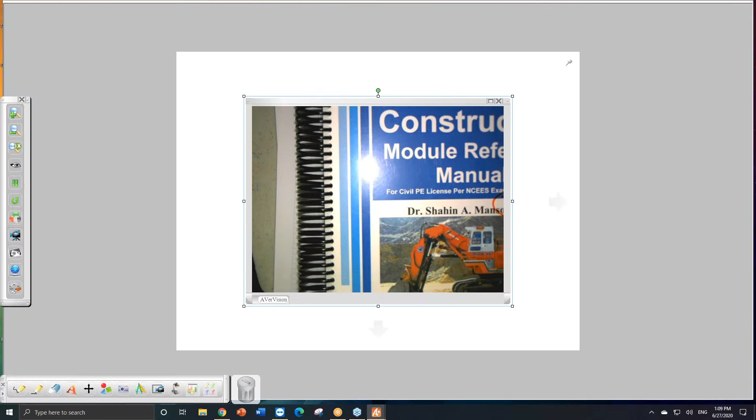So today is Saturday, the 27th of June, and this is a construction workshop. I hope all of you are healthy and studying very hard for the exam, for the October exam. Always check with the NCEES, as I mentioned before many times.

Today we have a session, and tomorrow also have a session for construction. We have it from 9 to 12 tomorrow, not as posted from 1 to 4, because I found there is a conflict. As I announced this morning, probably some of you were here and already heard this. For the civil AM, as I mentioned, I will have one session.

July 4th is coming, July 4th from 1 to 4. Transportation, I finished today, so no more sessions. I made one session to replace one of these sessions I missed.

So for construction, I have today, the 27th, from 1 to 4, and tomorrow the 28th, instead of 1 to 4, it is from 9 to 12, because I do have seismic tomorrow from 1 to 4. So there was a conflict, so I changed it, and I believe it was sent to you.

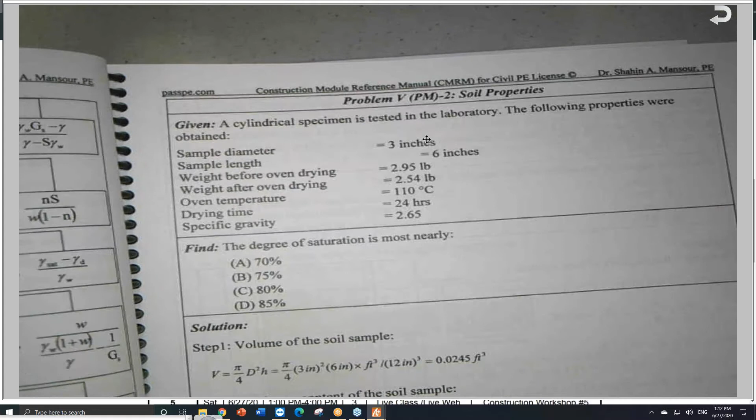Please make sure that you really understand the materials very well, especially the soil classification, because in this book here, for some reason -- that's why when I start the class I will send it to you guys -- if you look to the NCEES, let me bring one of the NCEES books here if I have it handy.

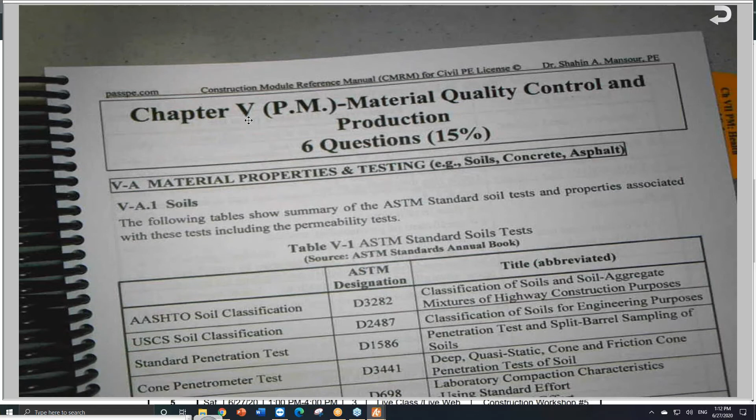They still include some problems related to soil classification for the afternoon, for transport, for construction. So for example, this problem here is from the NCEES practice exam for construction in the afternoon, a construction PM practice exam. I don't have a formal chapter for soil classification, and I need to include this or send it to you. I cover it for the AM, yes I do cover it for AM, but I will be glad to include it also with the PM for construction, for those of you who are not taking the AM.

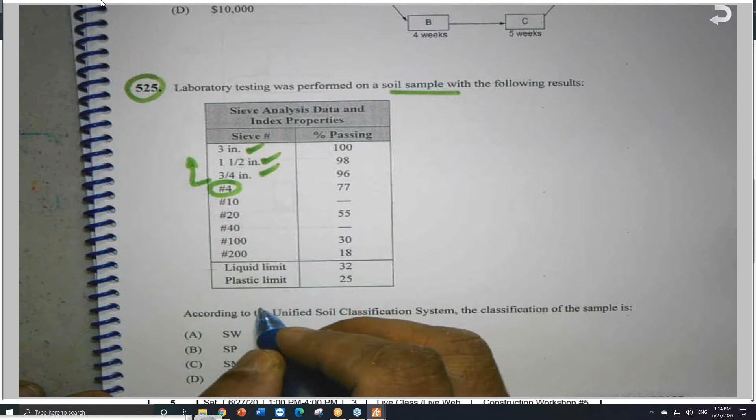So for soil classification, some problems are easy and some are really tough. Let's start with an easy one. Problem 525: laboratory testing was performed on a soil sample with the following results. Sieve number 3 inch, 1.5, 3/4, and number 4 -- anything before number 4 is expressed in terms of inches. After that they start to number them 4 all the way to 200, so this is 4 openings per linear inch, 10, and so on. And they provide the liquid limit, LL, and the plastic limit, PL.

And as you know, there are two systems. Here he needs it to be classified based on the Unified Soil Classification System, USCS. We will do it, but before I go to the USCS system, I will challenge you.

Let us solve the same problem. First, before I put the problem, I will call it problem 525A, okay? Another problem. I need the soil classification based per AASHTO, for the same given information. And I will look for four answers, and here will be the challenge - see if we're going to come up with four different answers, or all of us are going to come up with one correct answer.

But before I give you two or three minutes to do it, be careful about this. This is percent passing. Sometimes they give you percentage retained. So there is a huge difference.

And a common mistake that I found in the past - today is 6/27, and this is construction. So when you have a sieve, like number 4, which we said has 4 openings per linear inch, this is why you'll find that the opening of each one - 1 inch, as you know, is 25.4 millimeter, divided by 4. So if you divide 25.4 by 4, this gives you about 6.35.

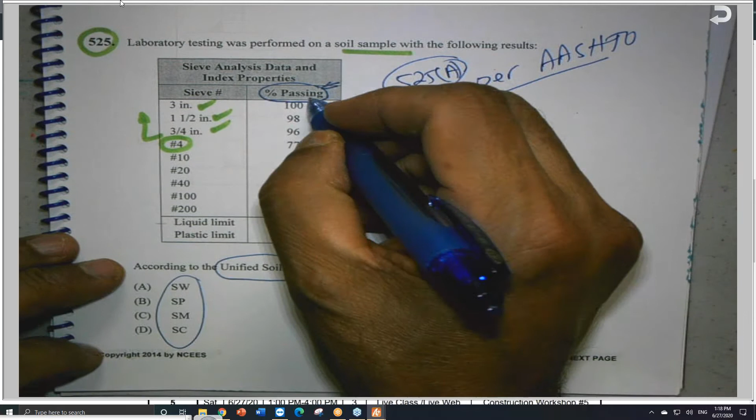So be careful on the problem statement - read whether it is percent passing or percent retained. So if this is number 4 and he gives me, for example, percent passing 77, that means the percent that went through is 77%. What is retained? Retained is the difference between 100 and 77. So that means what is retained here is 23% retained. So this is retained and this is passed - the percent passing or the percent passed.

Sometimes they give you this and sometimes they give you this. In our case, he gave us the 77%, the percent passing. And the same story - this is the one that went through, 77%, that means I have 23 retained. And if you go to number 200, I have 18% passed, that means I have 82 retained. So we always need to remember this, the difference between retained and passed, or percent passing.

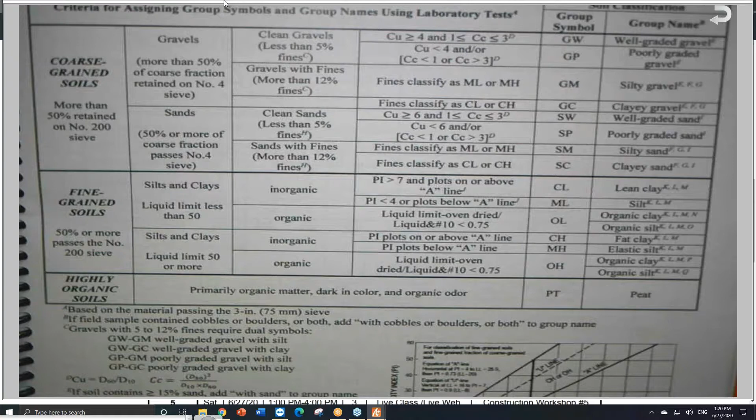So the chart that we use for the Unified Soil Classification System is a very famous chart. It's available everywhere in my books, and I'm sure you have it. This, for example, is from the AM book. But I will move to the AASHTO first. If you don't have the chart, here is a chart.

Here is a chart for the AASHTO - this is the chart that we use for the AASHTO soil classification system. I hope it's clear. If it's not clear, here it is, I will make it clear.

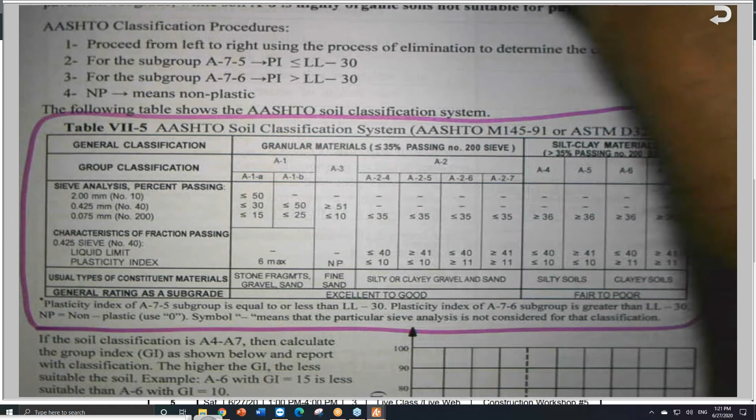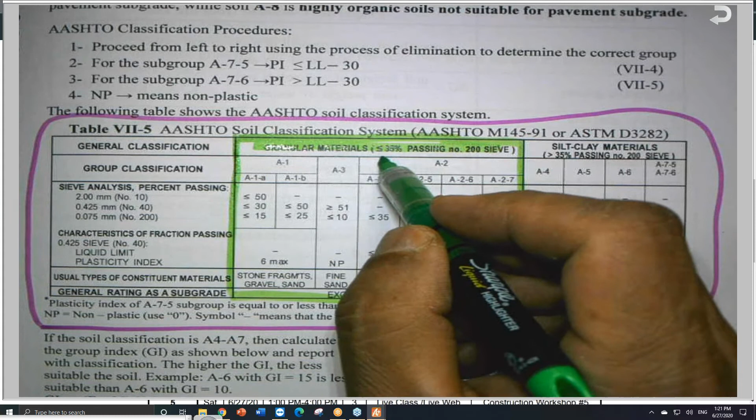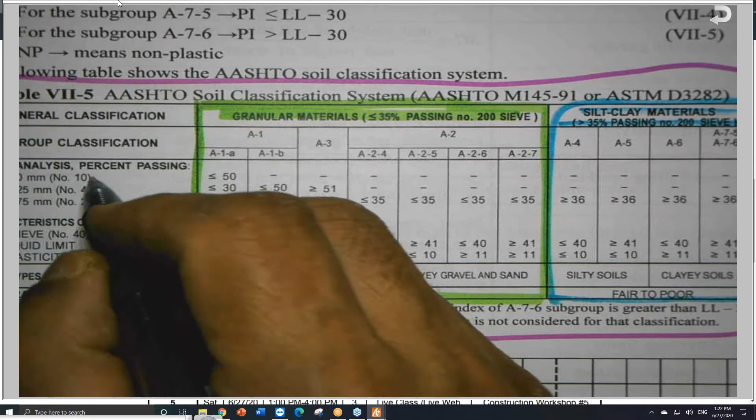As you recall, or as we discussed, this chart is divided into two main sections. This section here, which is the green box, is the granular materials, less than or equal to 35% passing number 200. And the blue one, next to it, is where we have more than 35% passing. Here is less than or equal 35%, and here is greater than 35% passing number 200. So if we are able to - and after that we have number 10, number 40, number 200, and here, by the way, the 0.075 millimeter.

And here is what else here? Number 40 and number 10, they have number 4, they don't have it here, which is 4.76.

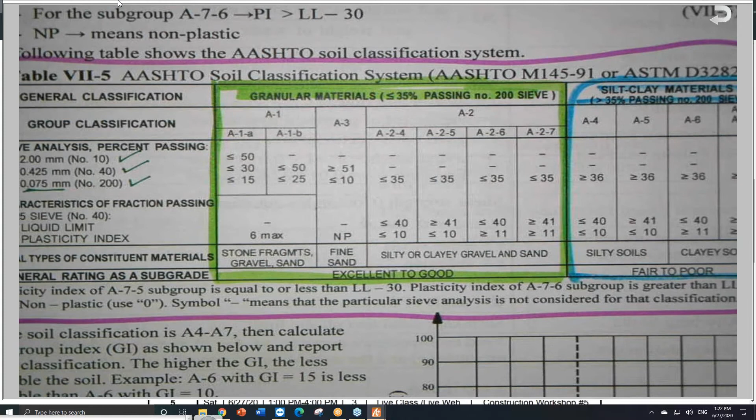So in this case, we need to decide if we are in the green box or the blue box based on the percentage passing number 200. The problem statement told us, here it is, already I did it for you. So this is number 200. So we have 18% passed and 82% retained.

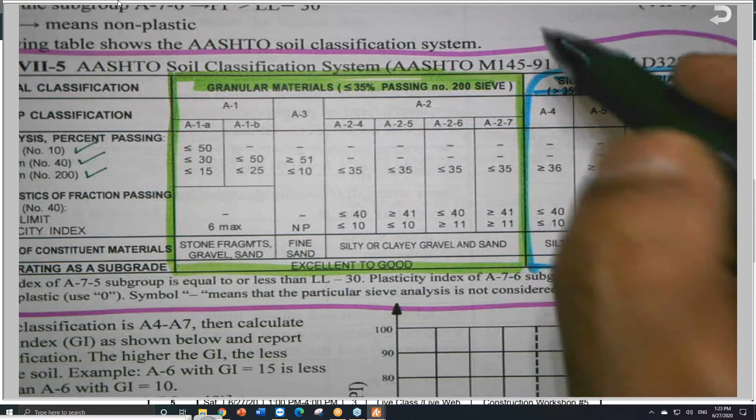Okay, and after that, using liquid limit and the plastic limit, let me give you a chance, all of you, using this problem and using the table in front of you, let us come up with the AASHTO system, which is based on the A system, as we call it. So it is A1, it could be A1A or A1B, A3, A2, and we have subgroups under A2, and after that A4, A5, A6, and A7 is divided into A7-5 and A7-6.

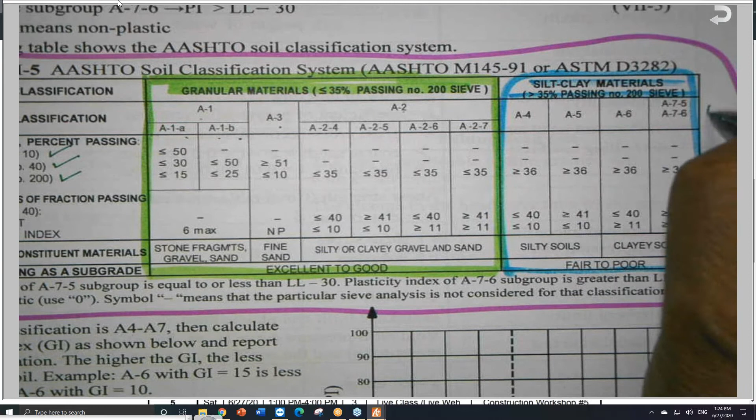Okay, so there is another column here. It is A-8, by the way, but it's dropped. A-8 is the worst soil that exists on Earth. It is not good at all for any kind of foundation, and this is why some books drop this column completely, because it is very bad soil, very bad soil.

And as you can see here at the bottom of this table, you'll find that we do have excellent to good. So A1 being the best, by the way, and the soil is deteriorating as we go this way. This is fair to poor.

So the soil quality is deteriorating, soil A1 being the best soil and A8 being the worst. We cannot really use it at all for any kind of foundation, either for a pavement or for a house or for any kind of foundation, because it is organic material, soil that has a lot of organic materials. And as you know, we cannot compact organic materials, because if you remember the compaction, 90%, 95%, and so on, we talked about this before.

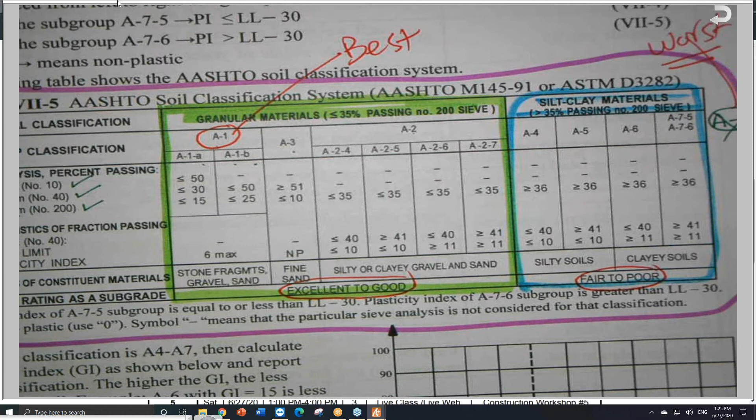Let me give you a few minutes, and I'm looking for problem 525. I need you to classify it per AASHTO, which is the A system. Give me the A number, and we will see if we are agreeing on one answer or what's next. Let me give you a couple minutes and do your best. Let me just zoom out a little bit just in case.

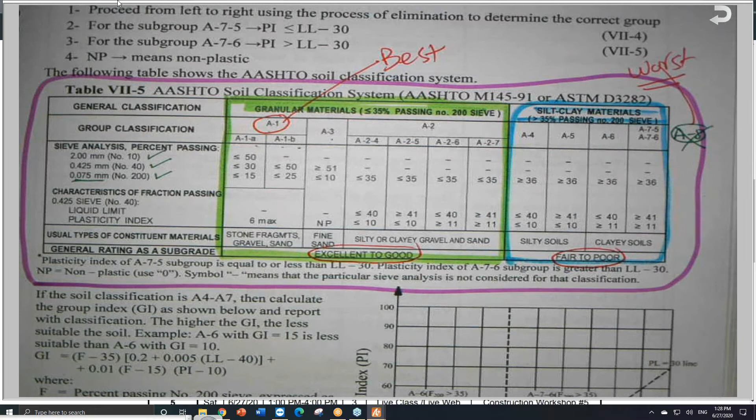Okay, so problem 525 of the NCEES construction PE. What is the soil classification here? I get A-2-4. A-2-4 and A-2-4 and 0.

Okay, and I will talk about what is meant by this 0 here. So we got two answers so far. Another answer, A-2-4.

Okay, look into this chart here. We have 18% passed number 200. So I am in the green zone, less than 35% passing number 200. So I am in the green, so I will see number 10. Number 10, I don't have any information about number 10 for whatever reason. And number 40, I have number 40. Also it's blank, so I will skip these two.

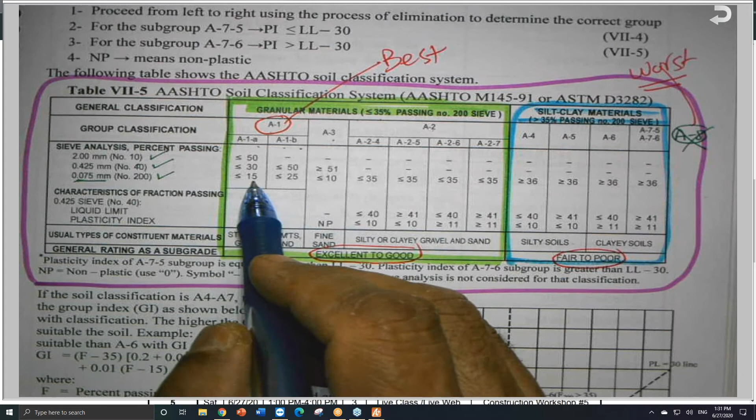So for number 200, I know percent passing is 18%. So number 200 here is less than or equal to 15, less than 25. So this is out and this is out. So A1 and A3 are out. So for 35, all of them are eligible, so A2-4, A2-5, A2-6, and A2-7. So I am in this category here, A2.

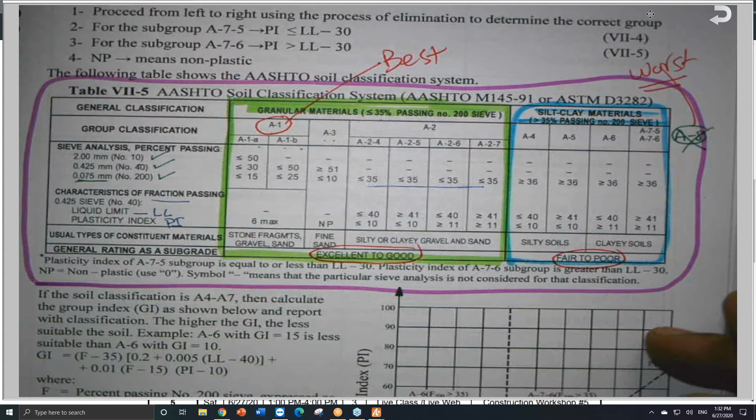Okay, and sieve number, characteristic of the fraction passing. Okay, so I have the liquid limit and PI, plasticity index, as all of you know. So plasticity index PI is liquid limit minus plastic limit. Liquid limit is 32 and the plastic limit is 25. So 32 minus 25 is 7. So PI, the plasticity index, is 7. So in this case, I am 7. So here I will come to liquid limit. I have 32, so this is less than 40, so this is less than or equal to 40. Greater than, this is out. Okay, less than, it may be. Greater than, so this is out.

It's a process of elimination. And after that, the PI. So I have only two left. This is less than or equal to 10, or greater than or equal to 11. My PI is only 7. PI equals 7, so in this case, this is out and this is in. So the answer so far is A-2-4.

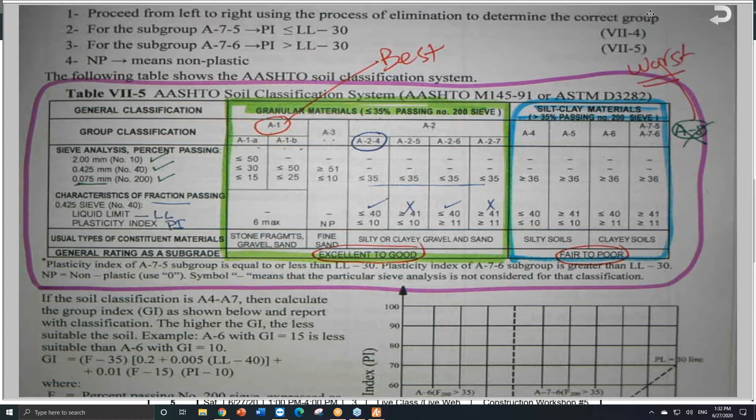A-2-4. So if the same problem is repeated again and I have answer A-2-4, this is the answer, whatever answer B, C, or D, based on the AASHTO classification system. Okay, some of you added the 0 next to it. We have something called GI, the group index. GI we use only for the AASHTO system, and the GI is given by this equation.

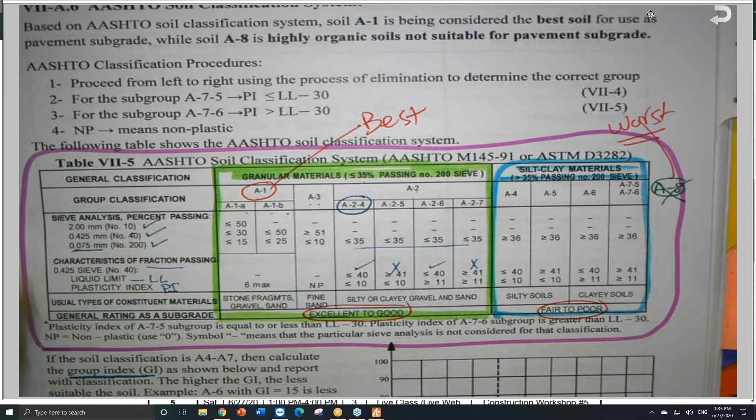So GI - the higher the GI, the less suitable the soil. What is the GI? The group index. If the soil is classified A4 to A7, this is a silt and clay, a fine soil. So for silt-clay soil where we have more than 35% passing number 200, the GI is applicable only to soils from A4 to A7. I need you to remember that.

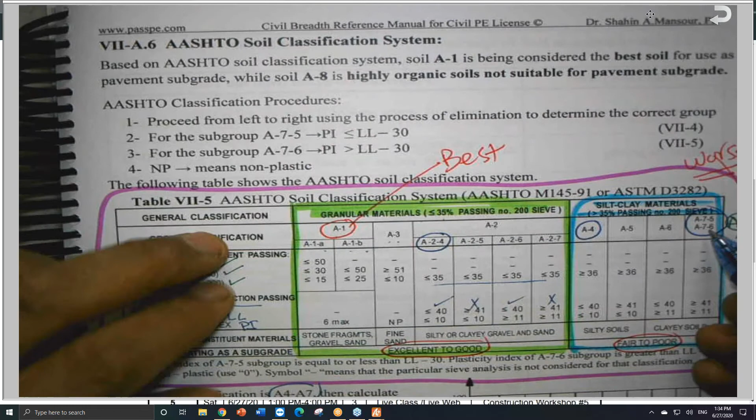By the way, for A75 and A76, if you are in the blue box, we use these two equations to decide which category we are in - whether we are under A75 or A76 - based on checking these two equations. So I need you to be aware of that, and decide which one based on the calculations.

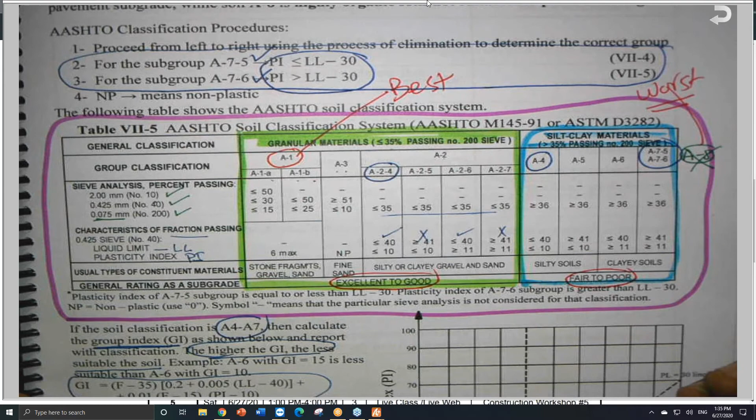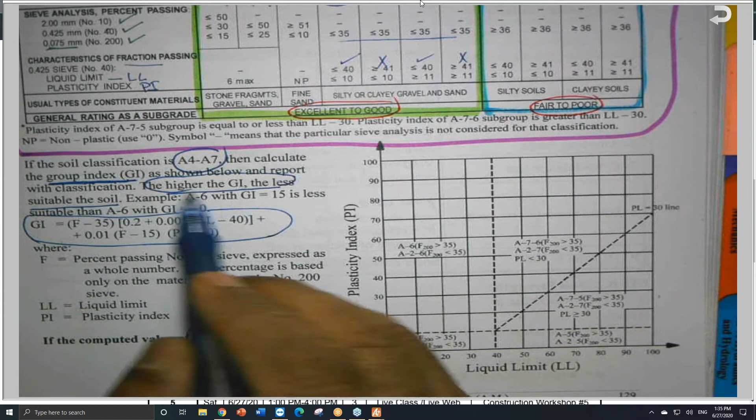Number two, the higher the GI, the less suitable. For example, A6 with a GI of 15 is less suitable than A6 with a GI of 10. So comparing GI of 10 and GI of 15, the one with GI of 15 is less suitable compared to the one with GI of 10.

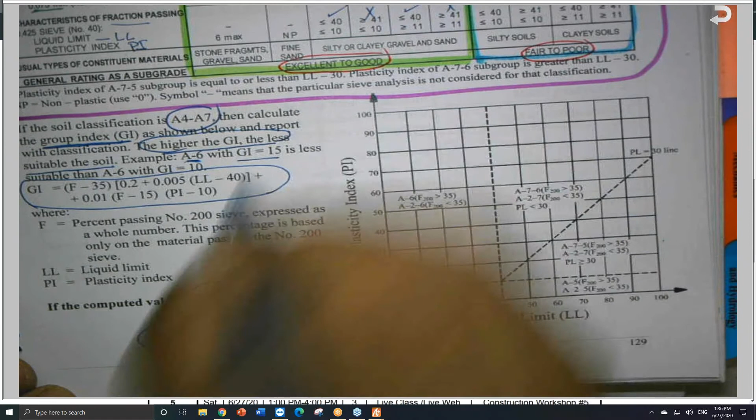So the lower the number, the better; the higher the number, the less suitable. If I have a choice between A-6 with 10 and A-6 with 15, he can ask you this question. He could also give you A-6 of 8 and A-6 of 12. So I give you 10, 15, 8, and 12, and you are asked to select one of these soils. Which one would you select? A6(10), A6(15), A6(8), or A6(12)?

The higher the number, the less suitable the soil; the lower the number, the better the soil. So the lowest number here is 8. I will pick this as the soil that is more suitable than the other types of soils as a good foundation material.

Okay, good, so far so good. So we need to be aware of the GI issue just in case he gives it to you. A-4 all the way to A-7 - we said those are the fine grained soils. And as you know, A7 is broken down into A7-5 and A7-6. So if you are between A4 and A7, the GI, the group index, could be calculated.

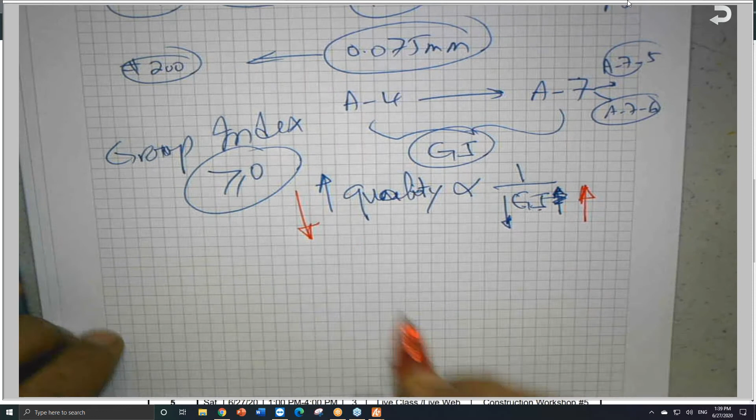So the quality of the soil is inversely proportional to the GI. The smaller the GI, the better the quality. The higher the GI, the lower the quality. So higher GI means lower quality, lower GI means better quality, or more suitable. So the soil with the lower GI is better - just a way to remind you of the relationship between the GI and the suitability or quality of the soil.

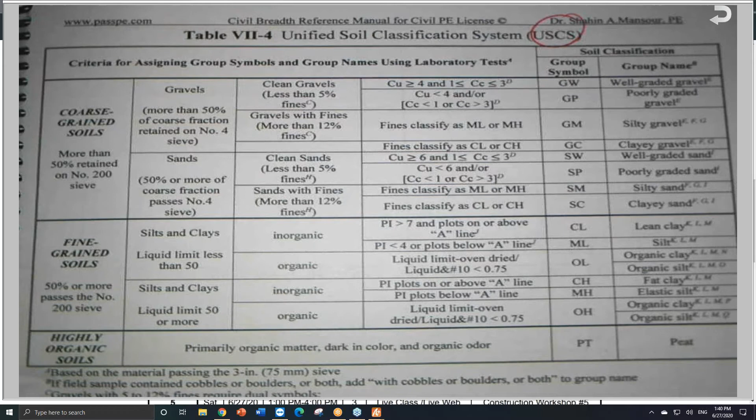So the Unified Soil Classification System is a little bit more involved - I don't like to say difficult. This is the table for the Unified Soil Classification System. What we are looking for is the group symbol, one of these.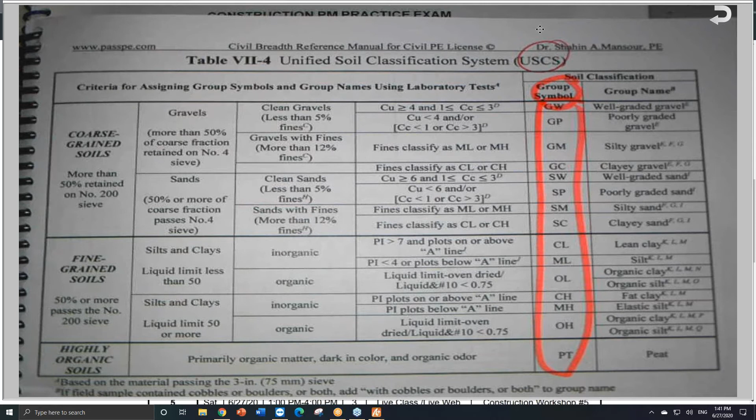This is what we are looking for. The table is divided into three main categories, in fact two of them are the main ones, and the third one is basically nothing, like the A8. So this is one, and this is two.

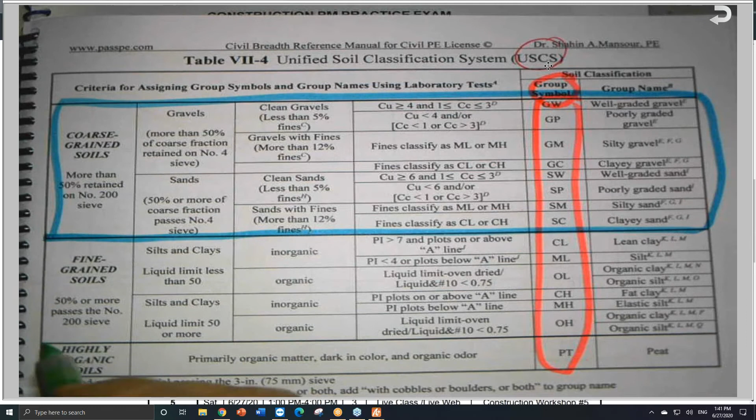And the third one at the bottom, the yellow one, which is organic material. Nobody will ask you to do that, because basically it's very easy. There's nothing really needed to be calculated or determined. It's just a matter of the soil having a lot of organic materials, natural materials. So this is primarily organic matter, dark in color, with organic odor.

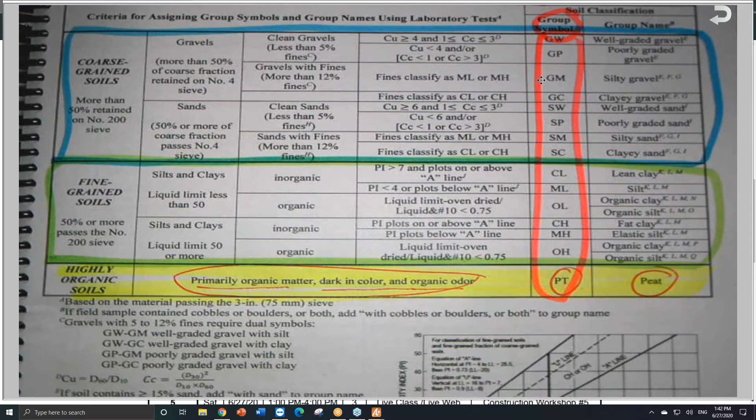And this is a highly organic soil. Obviously, this soil is not suitable at all. This is the worst. This is like A8, like the AASHTO classification system A8 group. A8 is the worst one.

So basically, I am between the blue and the green. The blue one is a coarse grain soil, which starts with G or S, sand or gravel. The second one, the green one here, is a fine grain soil.

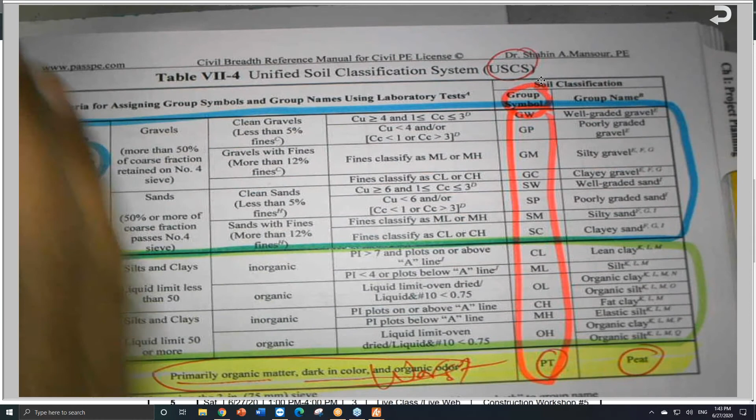So again, by the process of elimination, we need to first determine if we are in the blue box or the green box. The yellow, forget it, as I told you. After that, we proceed from left to right by the process of elimination until you come to one of these symbols, a group symbol here, and the group name is here.

For example, GW is well graded gravel, GP is poorly graded gravel, and so on. So they give us the name. If you'd like more info, there are also a lot of footnotes at the bottom here. They give the explanation for all these things.

I need you also to be aware there is something called the plasticity chart. This is called the plasticity chart for fine grained soil. We use it only for the silt and the clay and mixtures of silt and clay.

We have liquid limit and plastic limit because coarse grained soil like sand and gravel, they don't have something called liquid limit or plastic limit, because they are coarse grained.

And there is a handout, I believe I sent it. I would be glad to send it to you. I have more info about liquid limit and plastic limit. Probably during the break I will try to locate it, and if I locate it, I will be glad to go over it.

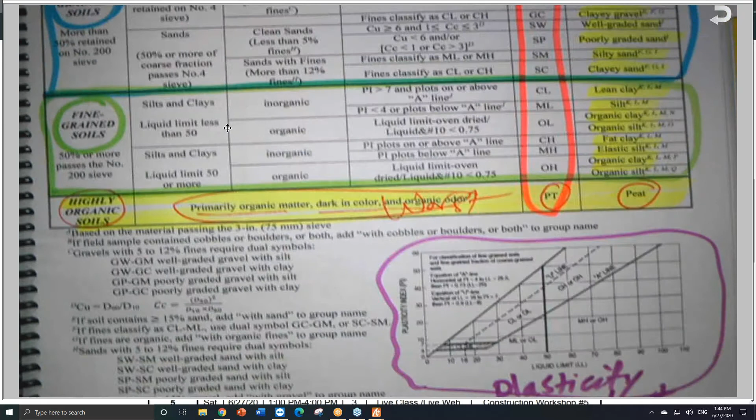So there are some questions you might be asked to determine, but it will be dual symbols. Here it is, like this. This is dual, D-U-A-L. And this is another one, this for gravel and this for sand, dual symbol.

So the moment you see it is SW-SM, for example, let me get closer here. Here it is SW-SM, SW-SC, SP-SM, SP-SC, or here GW-GM, GW-GC, GP-GM, and GP-GC. So these dual symbols could exist in one of the problems.

And they tell us how can we determine this? Again, it's still the same chart, and we can. Here we are lucky because the problem he asked, problem number 525 of the NCEES, is just a single symbol. So this is a very easy one.

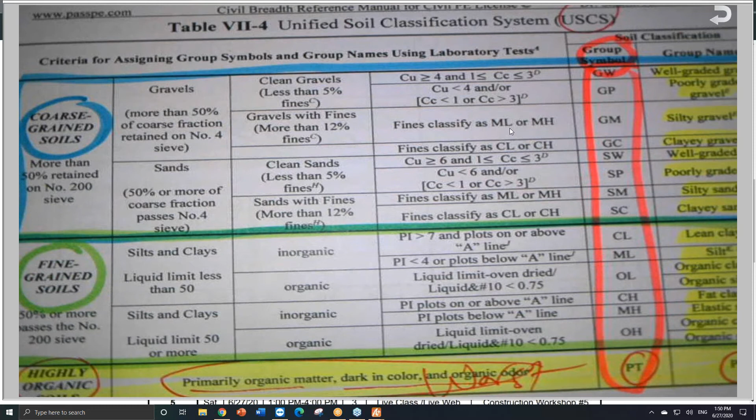So I got, okay, I got two different answers. Let us see. I got answer C and answer D. I got this and I got this, one of you or two of you, I believe. Okay, so we got SM and SC.

Okay, so C or D. Okay, and we got another answer C. Okay.

So if we look at this, we need to determine if I am in the blue or the green, which is either in the coarse or the fine. This is coarse, obviously, as you can see from here, starting with S. S for sand, S for sand.

As you know, the Unified Soil Classification System uses letters, not like AASHTO. They are using A1 to A8, as we discussed for the AASHTO system. So it's called the A system. This is the best soil, and this is the worst soil, and the soil is deteriorating as we move from A1 all the way to A8. A8, nobody will ask you to use it at all, or to determine or identify it, because it's very easy and nobody uses it.

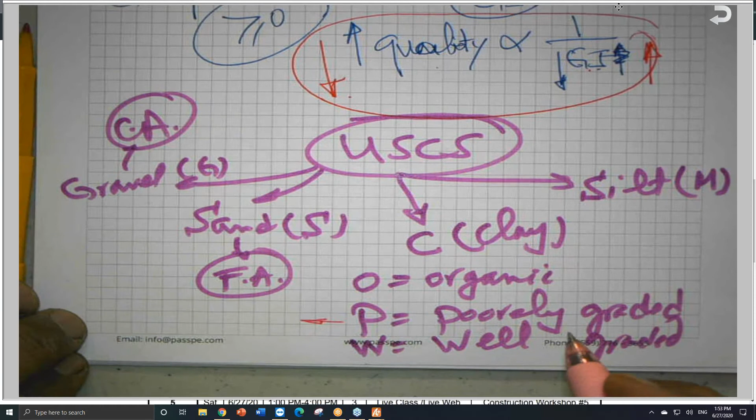As you recall my discussion before, maybe I mentioned that, and forgive me, sometimes I repeat myself, sometimes I assume I discussed something before, sometimes I don't. So, the poorly graded soil, this is, they have the same size, same size. Well graded is diversified sizes. So the poorly graded, which is the same size, like all the grains almost the same size. Okay, this is what is meant by poorly graded. Well graded is diversification, meaning there is a big one and there is a small one, so diversification. Okay, so the small particles will fit into the voids of the big ones.

You see the analogy, and this is what I'm telling you, that sometimes I repeat my jokes. Diversified, like when you buy mutual funds. Mutual funds consist of different stocks. You are diversifying your portfolio, as professional people use it. But same size is like one stock. If I buy one stock and it went up, I made some money, but if it went down, I will lose all my money. Diversified, like mutual funds, mixes different stocks, so they balance each other. One will go up, one will go down. If you like to remember it that way, I have no problem with that.

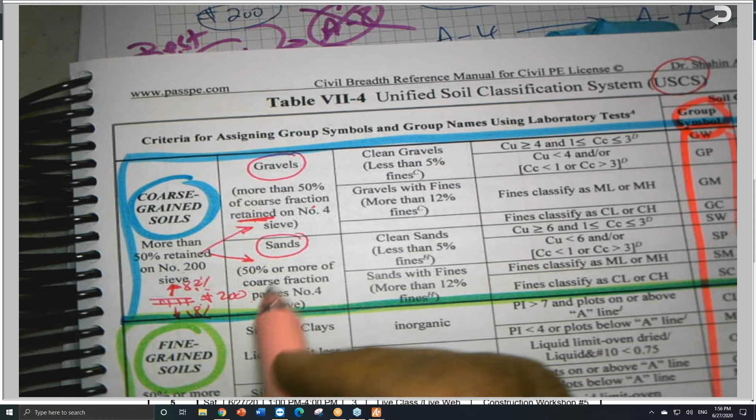You see, so sometimes when you draw something like that, this is very good. So more than 50% retained, so I have 82%, so I am here. After that, I need to decide if I am here or here, either gravel or sand. You're moving from left to right. So here for the gravel, more than 50% coarse retained. Be careful, sometimes they use retained, sometimes they use passes. For example, here, 50% or more passes number 4. Here they are using retained. So I need to look at number 4. Number 4, I have 23% retained and 77% passed. So I have more than 50, I have 77, so I am here. So right now I need to move, if I am here or here.

Okay, in this case, he said that the clean sands have less than 5% fines. What do you mean by fines? Let's go to H. When we have a dual symbol for the sand. I don't have anything right now to indicate that. And after that, sand with fines more than 12%. So when they talk about fines, they are talking about the percentage passing number 200. Anything passing number 200, we call it fine. So I needed to remember that.

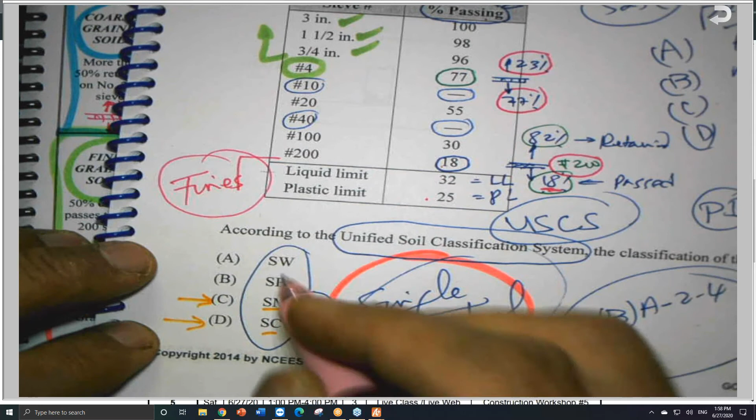So I have 18% passing number 200. So for sands with fines more than 12%, I have 18. So that means I am here. So I am either SM or SC, which are the 2 answers, by the way. Here it is, SM and SC. The answers C and D, they always do this. They give us problems such that you are confused between 2 answers.

So how am I going to decide right now? I have fines classifying as ML or MH. Here the fines are classified as CL or CH. This is the plasticity chart. So I need to come to the plasticity chart.

Do I have the liquid limit for this job? Yes, liquid limit is given to be 32, and the PI, plasticity index, is 7. So I have 32 and 7. This is 30, 32 is somewhere here. And 7 is here, so I am here.

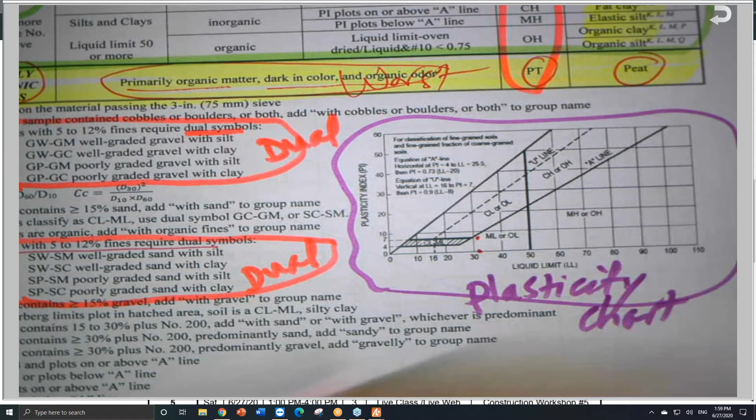So I have the fines classified either ML or OL. Let us look to the chart here. ML or OL, I have ML here. So my soil is SM, because the fines are classified to be ML. So the plasticity chart will help me decide between these two answers, and this is why the answer is C, which is SM. So this is the correct answer.

Agree or disagree? Those who selected D, I need you to be aware of that. You have to go one more step in order to get the answer. So the soil classification, some problems are really difficult, it's not easy like this one. This is an easy one, but we need to make sure that we really understand what is meant by this and this and this.

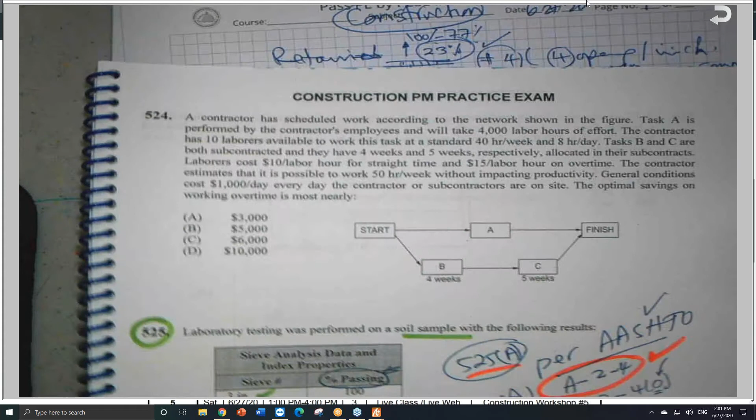Also, for example, if we compare this problem here, problem number 525, and we said that we have 525A which is AASHTO, and we agreed on the A-2-4 if you remember. So you can repeat the same problem. So if you compare this with this one here, let me give you a couple minutes to read it. Remember, you have only 6 minutes per question. Read it and let me know what do you think. Let us take about a couple minutes or so.

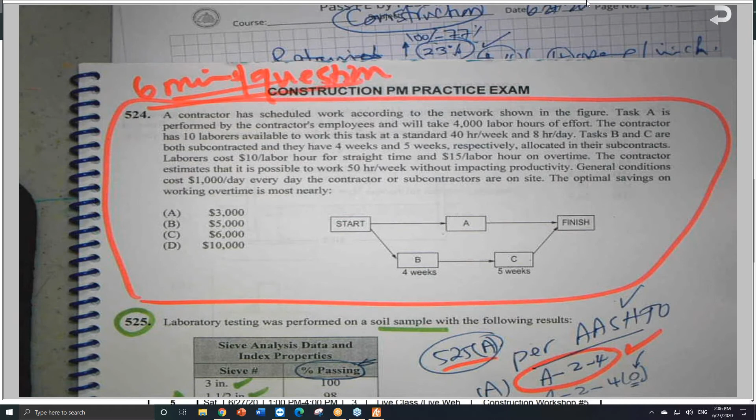Okay, obviously from my perspective, if I read this problem compared to the problem we just finished, and this is the reason I'm referring to it, obviously this one is easy and straightforward, and it would take probably, if we know the process and we're familiar with it, it's straightforward. There is nothing really very difficult or tricky around it.

But these types of problems have a lot of 'if this happens, what will happen? If this happens, what will happen?' Many scenarios - the problem has more than one scenario or many scenarios.

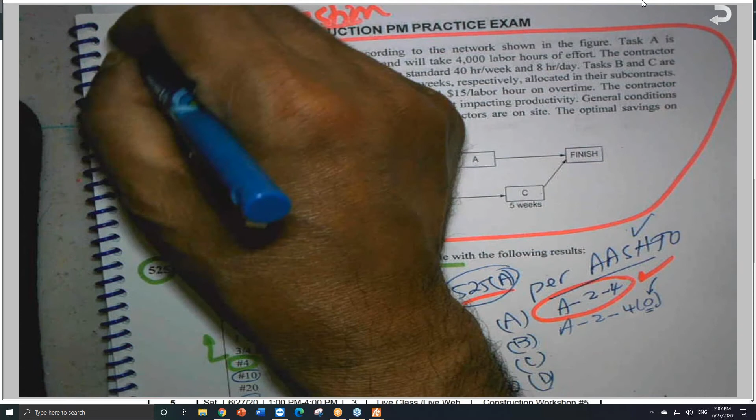In this case, the moment I look at the problem, I will probably spend very quickly, half a minute to read it, and I know how to do it, but it will take more than 6 minutes, or maybe exactly 6 minutes. If it's exactly 6 minutes, I will do it. If it is more than 6 minutes, I will skip it. I will mark or flag it, as they call it in the CBT.

The CBT, the computer-based test - this exam, the national exam, is going to be CBT very soon, and very soon means 2022, according to the NCEES. So the paper and pencil will be taken out, and this exam will be like the FE, like seismic and surveying in California and so on. So the trend nowadays is to computerize everything. They would like to save time, and I don't know how they're going to handle it.

And they already have some exams computerized, by the way, for the small groups, but civil is the largest.

So they made it, to the best of my knowledge, to be the last group to switch from paper and pencil to computer-based test. So if you read this, I say, oh my God, yeah, I know you can do it, but it will take time, and there is a chance for mistakes.

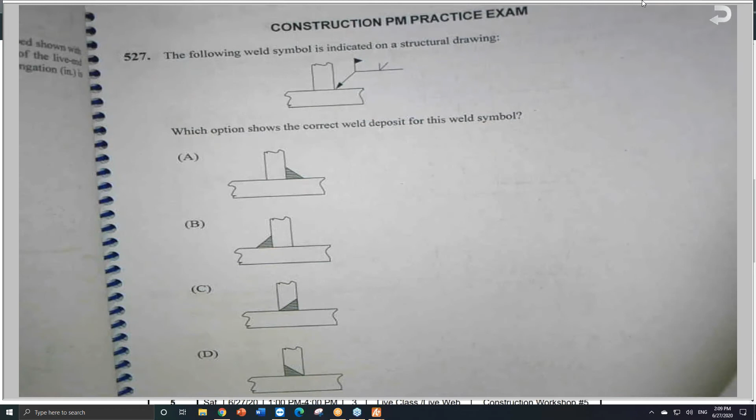So in this case, probably I will flag it and come back after. Maybe there's another problem. Oh my God, welding. If I know the welding symbol, it takes only less than a minute. Okay, and so on. This one here, for example, takes about 20 seconds.

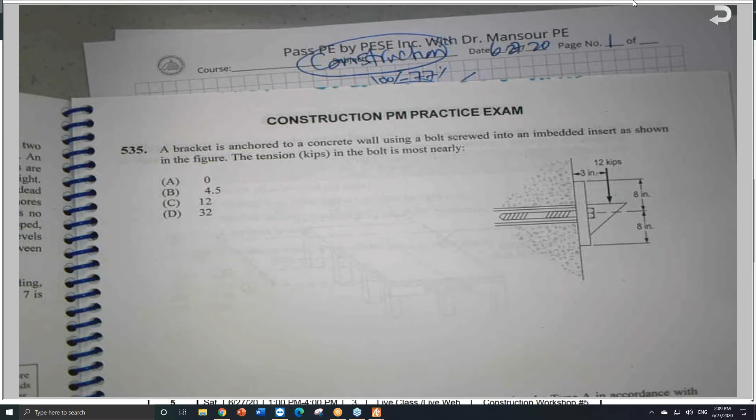Or a half a second, 20 seconds, 50 seconds, sorry, or 30 seconds or a minute. So there are some problems that are easy, and some problems that are really time consuming. I will explain this and go over it tomorrow, because I'm not feeling well today for some reason, the allergy.

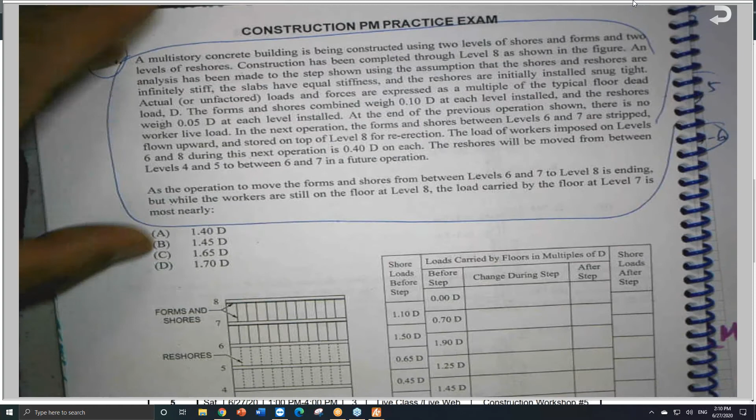Shoring and reshoring, this one here. You see, the moment that you read the problem, this is a problem. To read it, maybe you will forget what's mentioned at the beginning. And this is the given information here, and they give you a table to help you calculate the load transfer.

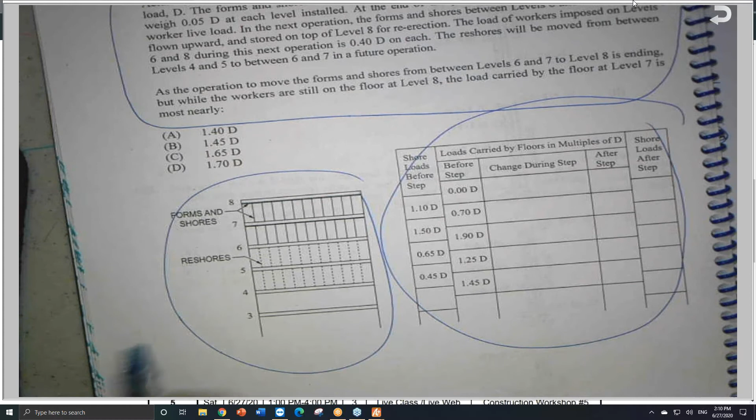This is called shoring and reshoring. This is the reshores, and this is the shoring. When they build multi-story concrete structures, because the forms are expensive, we are not going to keep the forms here. The dark areas here, these are the forms.

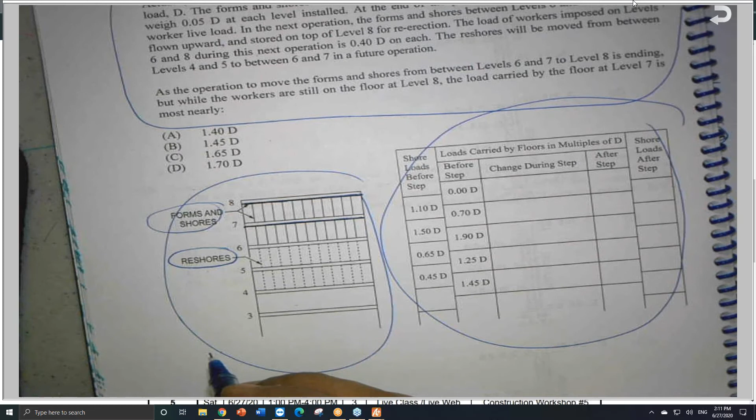And this is probably still fresh concrete. This is the last one. This is the one before. As you can see, these are solid and these are dotted.

This is reshores. Reshores mean that we provide support snug against this, because after the forms finish, they move the forms to build more stories, and because the concrete is not strong enough to carry the dead and live load, we provide what is known as reshoring. This is reshore, and this is reshore.

The vertical pipes hold this in place. This is hardened concrete. This is hardened concrete. And this is hardened concrete too. Okay, no forms here.

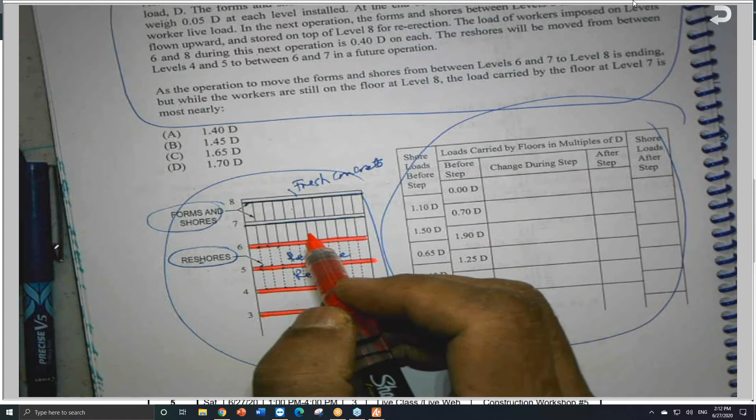They could have two stories like this for forms, or normally we use one story to save time and cost, because the forms are very expensive. But here he showed two stories. Let me use different colors here, and we'll talk about this tomorrow. They came up with different scenarios, relying on this book.

The book that they are using is SP-4, the 8th edition. I'll bring it tomorrow, the 8th edition. They are, it is, this is the 7th edition, but it's still the same, except that they are using color for this newer edition.

But the calculation, this is chapter 5. Let's go to chapter 5 to see what it used to be. Yeah, chapter 5, yes, here it is. Shoring and reshoring, okay, chapter 5, here it is. Loads and pressure, chapter 5 is still the same, and here they are using a little bit different symbols.

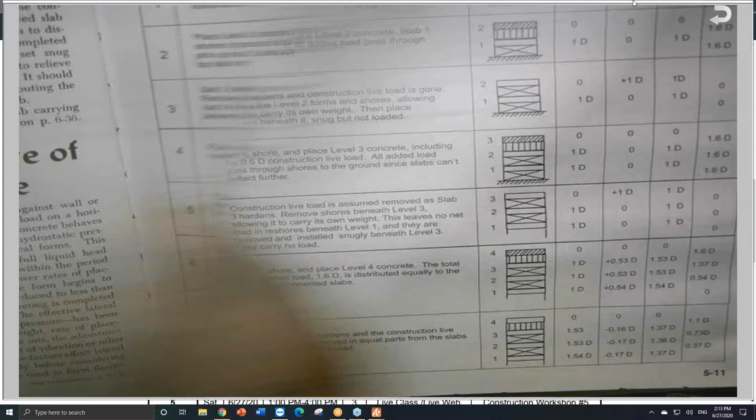This is the 7th edition, with different scenarios, and I'll explain it to you. These are the columns that they are supposed to fill, exactly like this one here. So this is no longer, by the way, the 7th edition is no longer in use. They are using right now the 8th edition. So this is what I know. It's a very expensive book, about $280 or something like that.

You are very welcome to purchase it. It does have two references. It has at the end ACI 347, I believe. So if you read the problem here, number 4, the problem that you read, the problem, the time it takes.

So after reading it, we need to be selective, as I said, in selecting the problems, because you must have a strategy in order to pass this exam. Don't insist on one problem because you know how to do it, but it will take more than 6 minutes, or it may take 10 or 15 minutes because you got upset and didn't get the answer, even though you know how to do it. Okay, so let's wrap it up, because the allergies start to bother me too much. I don't know what's happening to me.

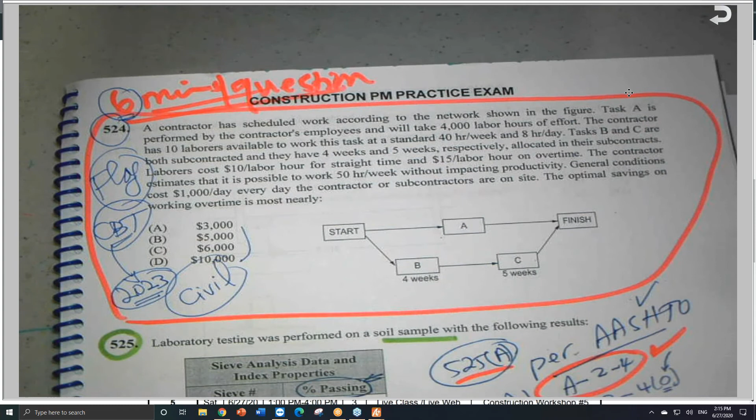So, anybody tried to get the answer? Anybody got any one of these answers? Do we understand the concept of the problem?

So he's saying that a contractor has scheduled work according to the network shown below in this figure here. Task A is performed by the contractor's employee, and it will take 4,000 labor hours of effort. So A will take 4,000 labor hours, LH. But we don't know how many weeks, because here he gave us 4 weeks, and here is 5 weeks. The contractor has 10 laborers available to work the task 40 hours a week, 8 hours. So this, how many weeks is that?

So in this case, 40 hours a week. So 10 times 40, this is 400. This will give you 10 weeks. So task A, based on this, needs 10 weeks. Agree with me? Task A. Okay, so task A will take 10 weeks start to finish.

So I have here 4 and 5. So which one is the critical path right now? The critical path is A, because it's 10 weeks from here to here to here. So the critical path, if they ask me what is the CP, the critical path, is A, start, A, finish.

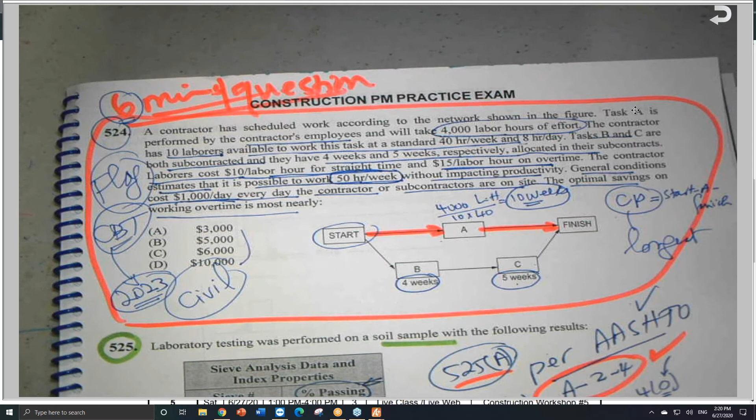So we need to know if we are going to save some money or not. Okay, so do you understand the problem? Again, the wording is very, very important, and the language they are using. If you miss one word or one keyword, by the way, it could really cause some kind of numbers to be mixed up.

So let us calculate the straight time cost and the overtime cost and see how much saving. Take the difference between them. The numbers are so easy as far as the math is concerned, the easy part of any problem, by the way. It doesn't matter transportation or construction or structure. Math is the easy part, calculation and multiplying. The most difficult part is to understand what is really given and what is required. So number 2,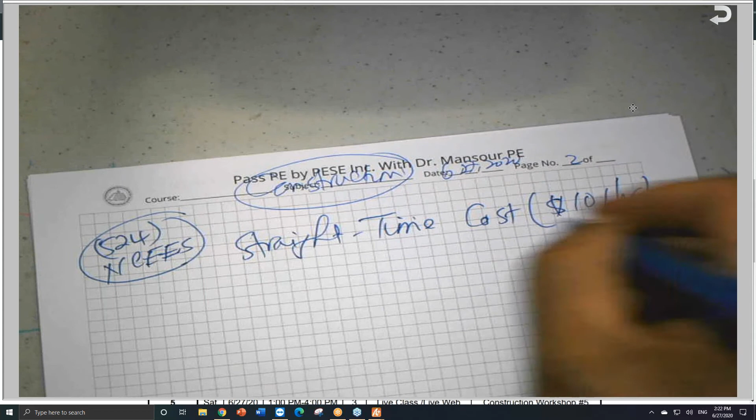So we have 4,000 labor hours. This is what he said for activity A. So in this case, how much do they charge? $10 per labor hour. So this will give us 40,000 for activity A.

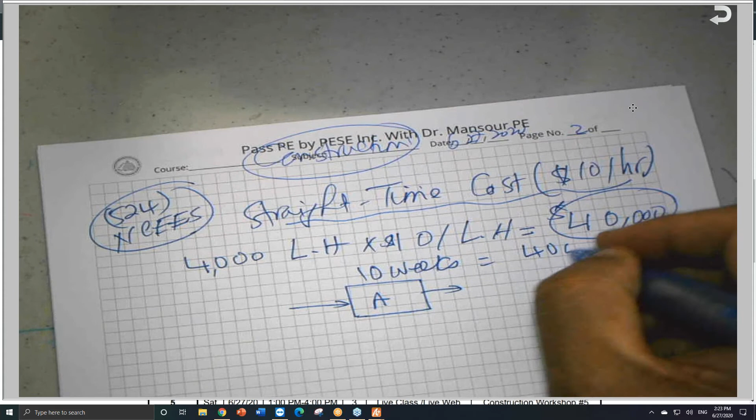Okay, and activity A, we said that it will take 10 weeks. Which is 4,000, if you remember. 4,000 divided by 10 labors and 40 hours a week. So this is 4,000 divided by 400. So this is 10 weeks.

And we do have, by the way, $1,000 per day on the site. So you can say that 10 weeks, or 50 days, 10 weeks, and this is 50 days, times $1,000 per day. So this is going to be what? It's going to be 50,000.

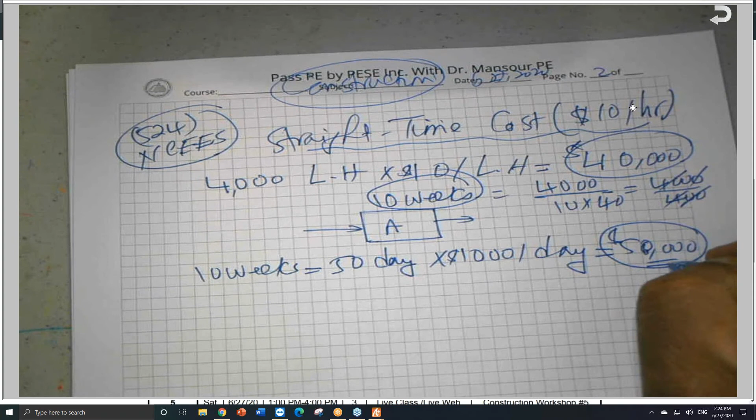So I have 50,000 here, and I have 40,000 here. So the total cost for the straight time is equal to 40,000 plus 50,000. This will give you 90,000.

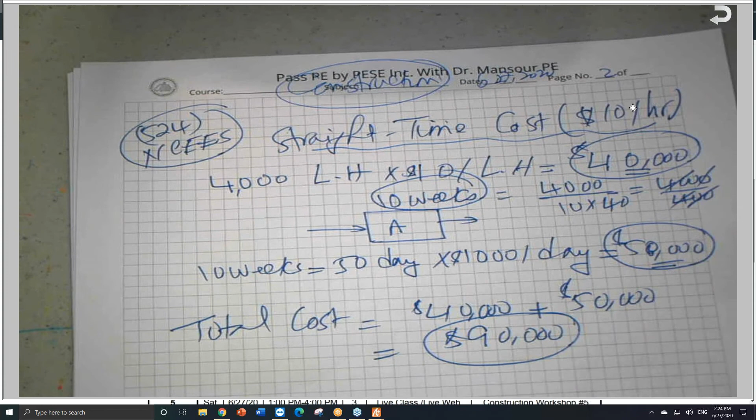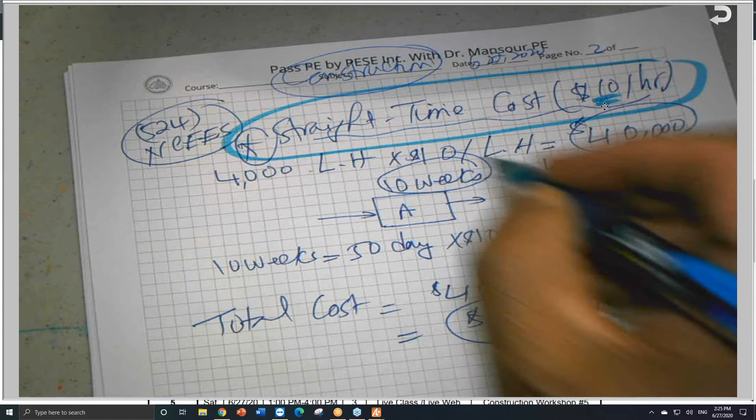Any question about the straight time? This is the first set of calculations that we need to do. Straight time at $10 an hour. We know how many people are working and how many hours they're working, and there is a fixed cost. Fixed cost is $1,000 per day. This is like a fixed cost per day. I have 50 days, which is 10 weeks. We calculated 10 weeks, we know how to get 10 weeks, and we estimated this to be 90,000.

Right now, we need to look to the other option, which is overtime. So he said that task B and C are both heavily crashed, that's okay. The contractor estimates that it is possible to work 50 hours a week without impacting productivity. So general condition exists with the contractor. The optimal saving on working overtime is the question: who's going to work overtime?

Remember the original schedule, this is 10 weeks, and they have here 9 weeks. So this is the critical path.

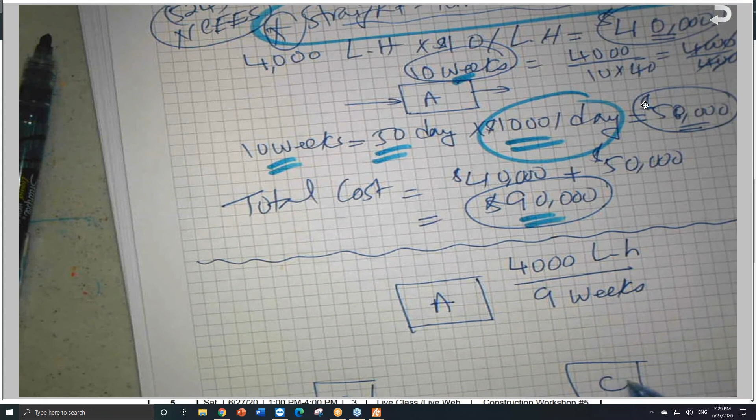So if you do that, how many hours do we need to work per week? Let us calculate that. So it is 4,000 divided by 9. This will give me 444.44 hours per week.

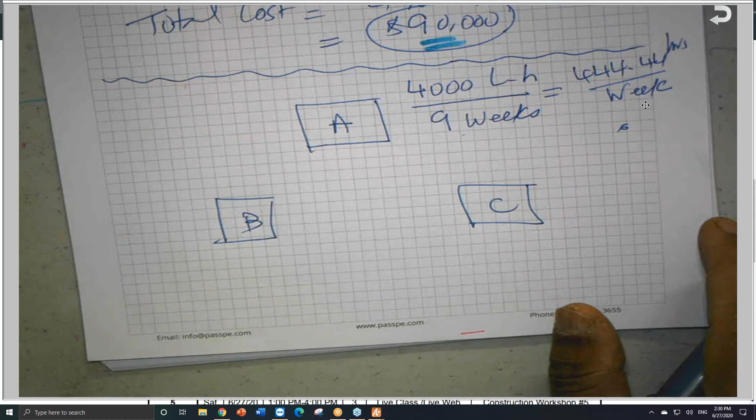Remember, I have 10 people working here, 10 times 40 hours a week, so it is 400 hours a week. This is the standard pay, to finish task A in 444.44 hours.

That means there is a difference. How much? Delta. How much delta? The delta is between 400 minus 444.44 hours. So this will give me 44.44 hours. Do you agree with me?

So right now, let's calculate the cost. Since I know how many hours will be straight hours and how many hours will be paid at $15 an hour, okay, so right now, the cost for with overtime. So I have straight, I have 40 hours a week.

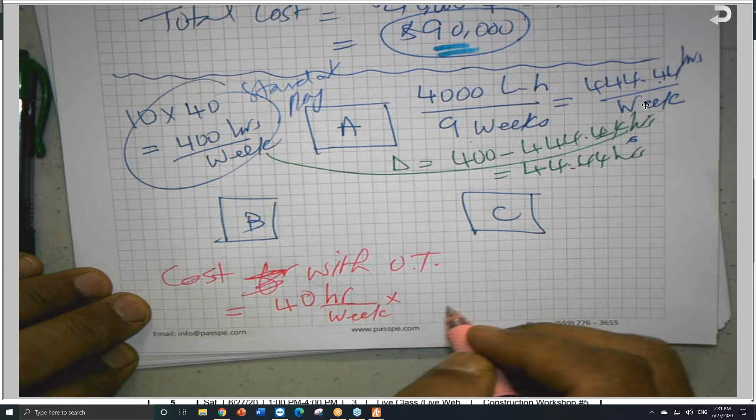Times I have 9 weeks, and I have 10 workers working over there. So this will give me the straight, okay, I have 9 weeks, $10 per hour, sorry. And we can say 40 hours a week and 9 weeks. Here it is $10 per hour, not 10 work per hour. This is the straight. So this will give me what? Will give me 40, 9 times, 10 times, I get 3,600. 40 hours a week and $10, 9 weeks, but I have 10 workers. I have 10 workers, so I multiply by this, for 10, another 10 workers. Forgot that. So it is 40, 9 times, 10 times, 10 times. So this will give me $36,000. This is for the straight, which is $10 per hour.

Okay, so in this case, this is for 10 workers, so we need only 9 weeks here. So it is 44.44 times 9 times 15. I got $5,999.40. This is for 9 weeks, because 44 per week. So in this case, I have this additional cost.

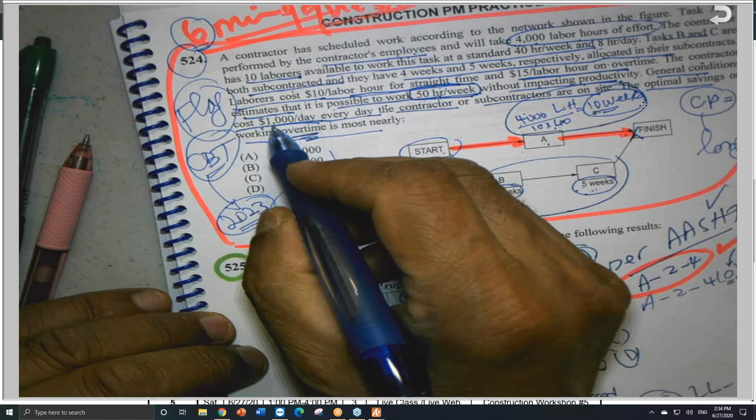Plus, don't forget the last cost, which is $1,000 per day. So I have $1,000 per day times 9 weeks times 5 days a week, because the number of weeks right now reduced to 9.

So in this case, we need to get the total cost. This number here will come what? 1,000, 9 times 5 times, it is 45,000, and 5,999.40 plus, and 36,000 plus, I got 86,999.40.

Versus what? Versus the 90,000 that we calculated before. So the difference, or the saving if you like to call it, is equal to $90,000 minus 86,999.40, will give us in the neighborhood of almost 3,000.

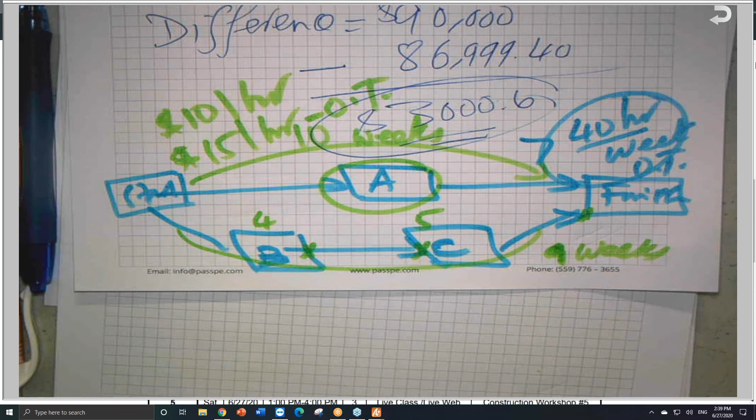And always, as I always mention, here I'm going to scan it and send it to you, but you can look at it and see. Always ask yourself, as far as calculations, do I have another method or another approach, or way or technique, whatever you call it, to solve the problem? For example, I just solved it, or we worked it together. You may disagree and tell me, Dr. Mansour, there is a shortcut. So always, is there a shortcut? A shortcut.

Very important. If we can, by looking at the problem - and I said, oh, why am I doing all this? I know there is 1 week difference between these two. I will take the 1 week, and this will be the saving, and that's it. One week.